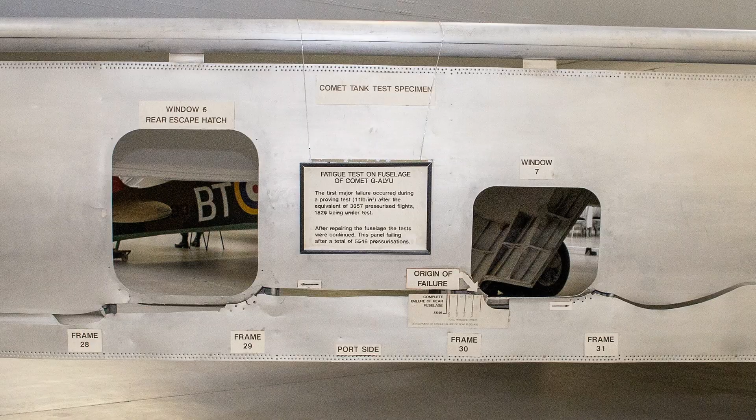Engineers call the internal intensity of a load stress. When that stress rises and falls again and again, the part experiences cyclic loading. Fatigue means those cycles can consume the part's life, even when each individual load stays below the force that would break it at once. The process usually has stages.

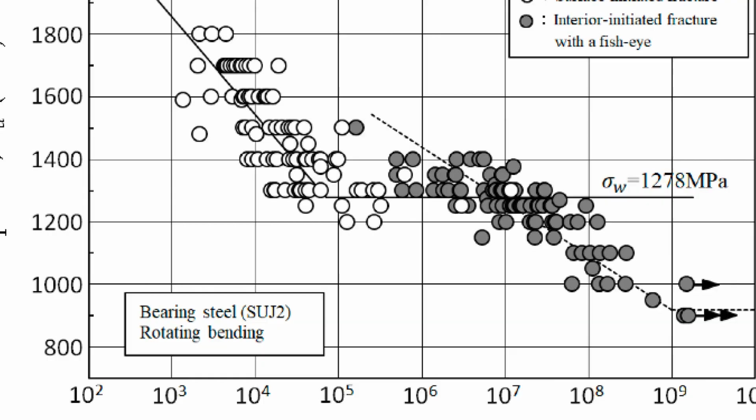A tiny crack begins, often at the surface. It grows a little with many cycles. Then the remaining uncracked metal becomes too small to carry the load. The final fracture may look sudden, but most of its history was quietly written beforehand.

That hidden history matters wherever metal is asked to work repeatedly: railway axles, bridges, aircraft cabins, turbine blades, offshore structures, and pipelines. The loads may come from wheels, pressure, vibration, waves, wind, or temperature. The common enemy is time counted in cycles.

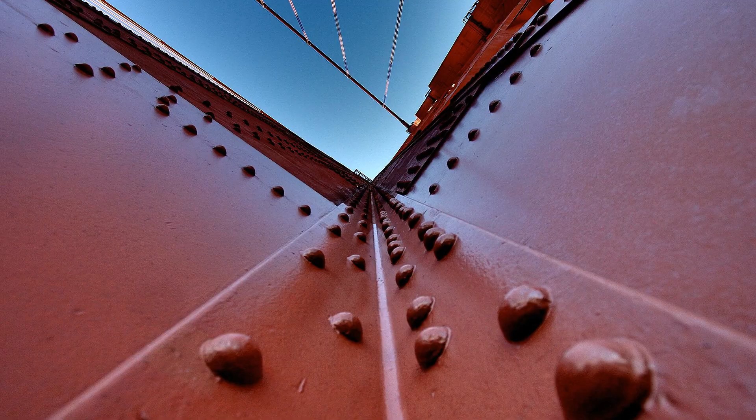Shape matters as much as material. A hole, thread, shoulder, scratch, or sharp corner can create a local spike in stress, called a stress concentration. The whole component may appear lightly loaded, while one small edge is doing dangerous overtime.

The 19th century railway made the problem impossible to ignore. In 1842, an axle failed near Meudon on the Versailles line, contributing to a fire and the deaths of about 60 people. Trains had created a vast experiment in repeated loading, except the specimens carried passengers.

So the greatest pioneer in this field cannot merely be the first person to notice broken metal. The winner must recognize repetition as the cause, build convincing experiments, turn results into quantities designers can use, and change how working machines are judged before they fail.

Deep in the Harz mining district, Wilhelm Albert faced iron hoisting chains that broke after long service. The loads were ordinary, but the consequences underground were not. His importance begins with treating those failures as a repeatable engineering problem, rather than bad luck or a mysterious weakness in one chain.

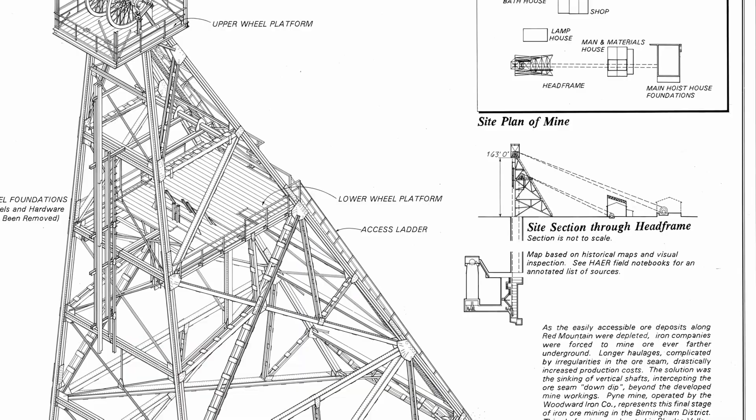Albert built a machine that repeatedly loaded chain links and reported the first known fatigue test results in 1837. That was a decisive change in method. Instead of waiting for service to supply another corpse, he made repetition happen on command and watched what survived.

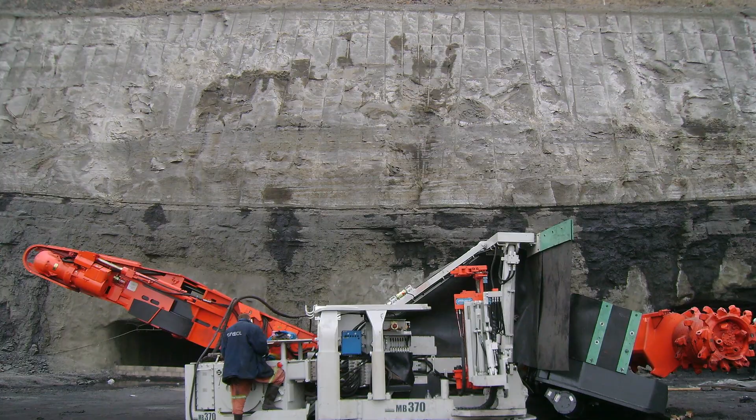His experiments were close to real mining hardware, which gives them unusual practical weight, yet they remained centered on chains and the immediate mining problem. Albert proved that repeated use could destroy metal, but he did not build a broad numerical system for predicting the life of axles, beams, and other machine parts.

William John Macquorn Rankine approached the danger through railway axles. In 1843, he described fractures that developed progressively in service. He also warned that abrupt changes in an axle shape were dangerous and recommended generous curves where one diameter met another. That advice was remarkably modern in spirit.

A smooth radius spreads stress, a sharp shoulder crowds it into a smaller region. Rankine was connecting visible geometry to hidden damage, giving railway engineers a way to improve a part before anyone could see a crack.

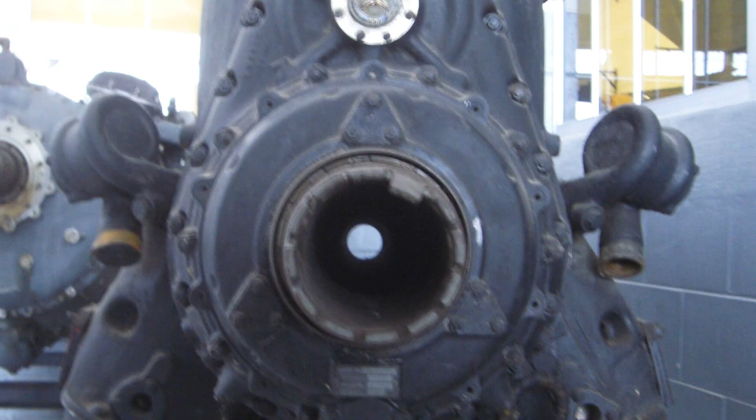But Rankine's contribution was primarily diagnosis and design judgment. He did not establish a sustained experimental program that mapped different stress levels against the number of cycles to failure. He showed where fatigue liked to begin, without yet supplying the full clock that measured its progress.

William Fairbairn brought a different strength, scale. One of the great experimental engineers of Victorian Britain, he subjected wrought iron girders to repeated and vibratory loads. His specimens resembled the structures engineers actually wanted to build, not polished coupons chosen for laboratory convenience. Fairbairn's work asked whether long continued changes of load could weaken full-sized iron construction.

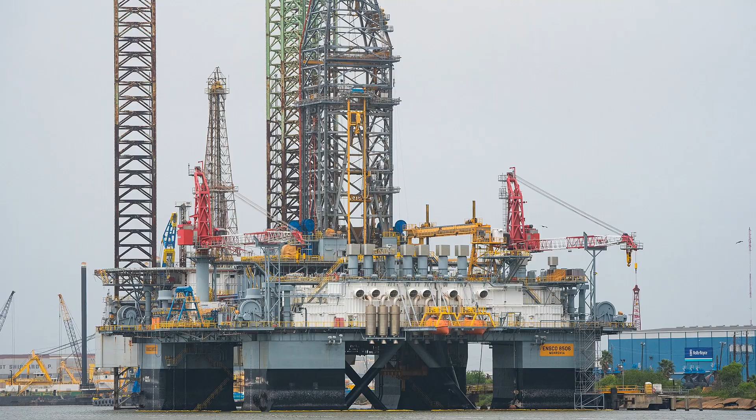That mattered to bridges, cranes, and ships, where a reassuring static calculation could miss the effect of years of movement. He helped drag fatigue out of the axle box and into structural engineering. The limitation was coherence. Large tests could reveal whether a particular girder endured, but they did not automatically produce a compact, transferable design law.

Fairbairn expanded the battlefield magnificently. He did not organize every variable into a system that a railway workshop could apply part by part.

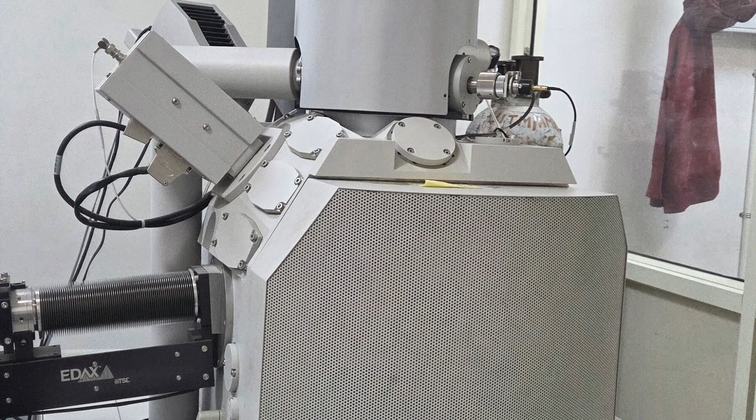James Alfred Ewing and his colleague J. C. W. Humfrey then looked inside the process itself. In 1903, they observed polished metal under repeated stress and saw slip bands, fine visible lines where crystals had begun sliding along preferred planes.

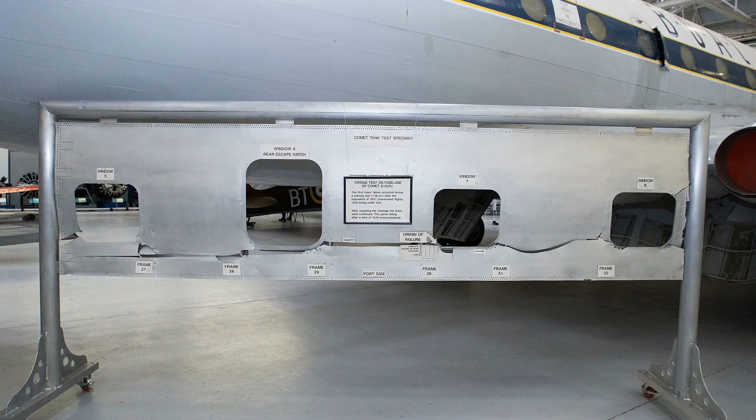Those bands were not decorative scars. They marked concentrated microscopic deformation, and cracks could develop from them. Ewing and Humfrey gave fatigue a physical mechanism, replacing the vague idea that metal simply became tired with evidence of how irreversible damage accumulated inside its structure.

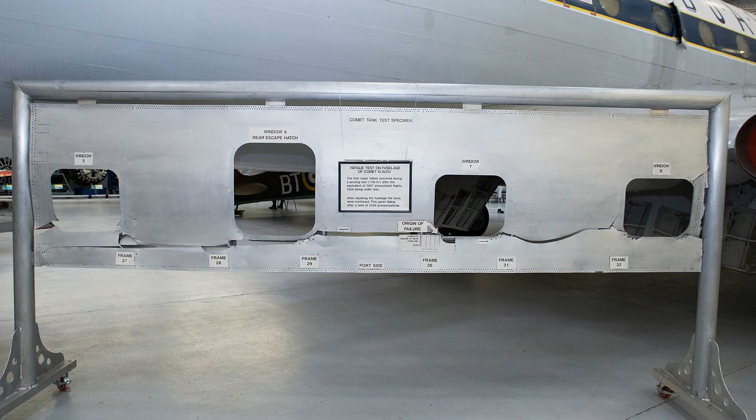Ewing is the strongest rival because mechanism changes understanding at the deepest level. Modern materials science still depends on watching how crystals deform and cracks grow. Yet his landmark microscopy came after engineers already had an operational framework for testing repeated loads and setting allowable stresses. He explained the hidden machinery of fatigue more clearly than he founded its design discipline.

The GOAT is August Wöhler. His achievement was not one isolated observation, one clever warning, or one striking laboratory image. He joined service measurements, purpose-built machines, long test series, and practical design limits into the first durable engineering system for metal fatigue. Wöhler worked for the Prussian railways, where axle failure was an operating problem rather than an academic curiosity.

In 1858, he measured the loads acting on axles during real journeys. He then calibrated those measurements, connecting what happened on the track to forces he could reproduce in controlled tests. He developed several machines for repeated bending, twisting, and direct loading. That variety mattered. Fatigue was not a property revealed by one favorite apparatus.

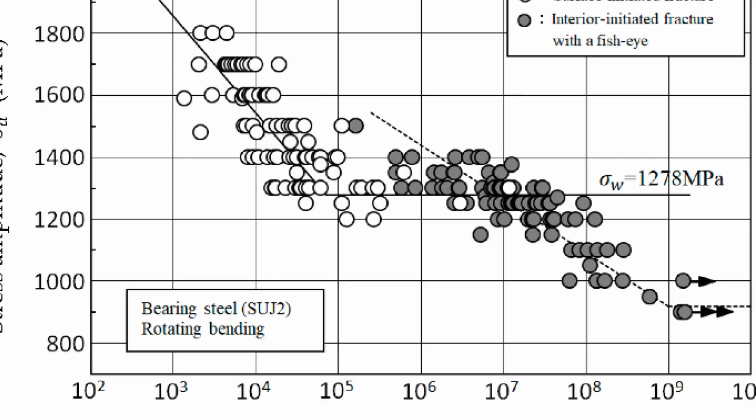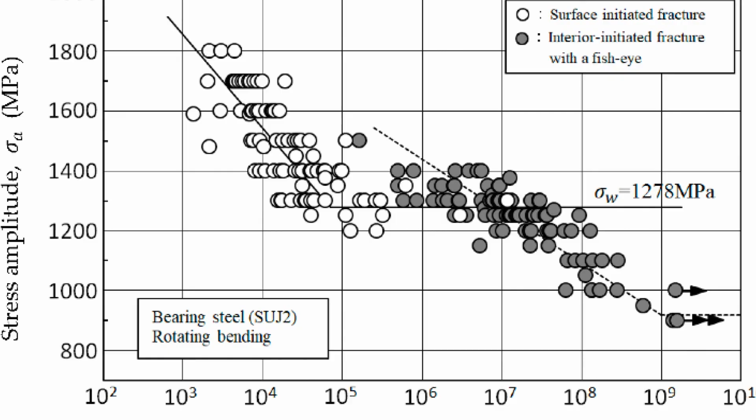It had to survive changes in loading method, specimen shape, and material before it could become dependable engineering knowledge. Across reports beginning in 1860 and culminating in 1870, Wöhler established the central fact: repetitions of a stress far below a metal's one-time breaking strength could still cause fracture. He also showed that life changed systematically with stress, making failure something that could be compared and estimated rather than merely remembered.

He separated two quantities that engineers still watch. Stress amplitude is how far the load swings during each cycle. Mean stress is the average level around which that swing occurs. Two parts can experience the same range of movement but have different lives because the whole cycle sits at a different average tension.

Wöhler also tested details that real machines could not avoid, including changes in section and other notch-like features. He moved from simply recording fractures toward allowable working stresses and finite life design, choosing a load because the component must survive a required number of cycles, not because it passed one heroic pull.

The familiar stress life graph places applied stress against cycles to failure. Wöhler published much of his evidence in tables. Later engineers plotted and extended it, and the curves eventually took his name. That distinction matters. His greatness does not depend on crediting him with every line drawn afterward, but on producing the data and logic that made the graph useful.

His work earned international attention, including at the Paris exhibition of 1867. More important, railway authorities could act on it. Axles and other components could be tested under repeated loads, compared across designs, and assigned limits grounded in evidence rather than tradition alone. That is the decisive advantage over the earlier contenders.

Albert made repetition experimental. Rankine exposed dangerous geometry. Fairbairn brought structural scale. Wöhler absorbed those practical questions into a program that linked service, laboratory, numbers, and design. Fatigue testing could now become an institution, not a heroic one-off investigation.

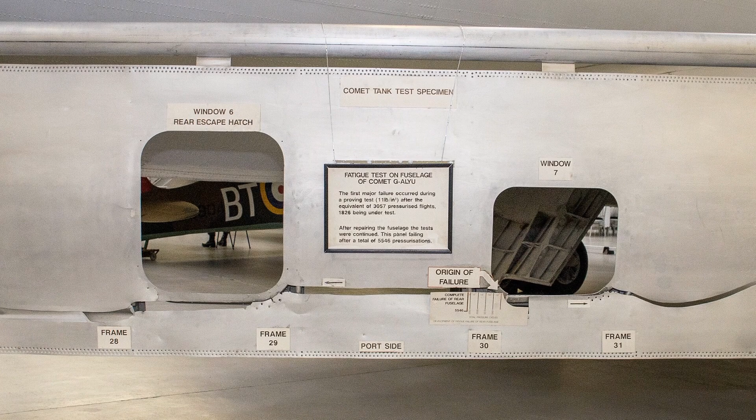Wöhler's framework was not the final word. Test results scatter. Real loads vary rather than repeat neatly. Corrosion, temperature, manufacturing defects, and residual stress can alter life. Some steels show a practical endurance limit, a stress below which very long survival is possible, while many other metals do not offer such a clean threshold.

Modern safety therefore adds other strategies. Safe life design retires a part before its predicted fatigue life is spent. Damage tolerance assumes a small crack may already exist, then uses fracture mechanics, the mathematics of crack growth, together with inspection intervals so the crack is found before it becomes critical.

Aircraft cabins, wind turbines, bridges, trains, and pipelines now live inside that layered approach. Measure loads, test repeated cycles, account for details, extend usage, and manage remaining life. Wöhler deserves the title because he made time itself a design load, turning hidden repetition from an explanation after disaster into evidence engineers could use before it.